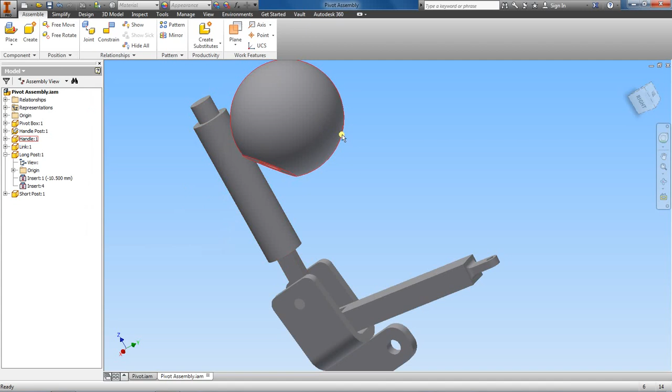Finally, let's go ahead and assemble the handle onto the handle post. As you can see, this is a circular shape here, and it is going into this hole here.

So when I go to constraint, the best assembly option to choose would be insert, and we are going to want... let's see how we want to do this. We will do these oppose. Let's see what this gets us.

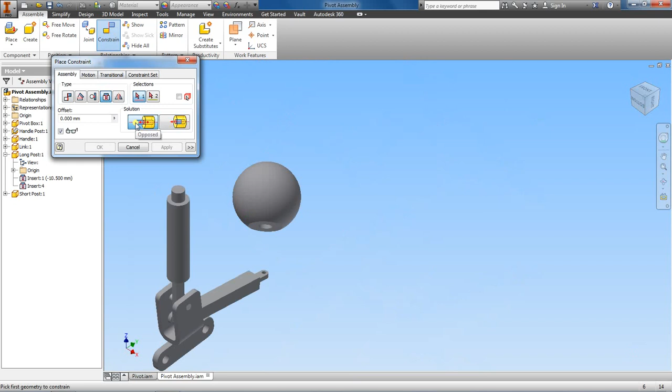Okay, so here I'm choosing the top part of the post, and then here I'm going to choose this outer edge. Let's see, this is what I get.

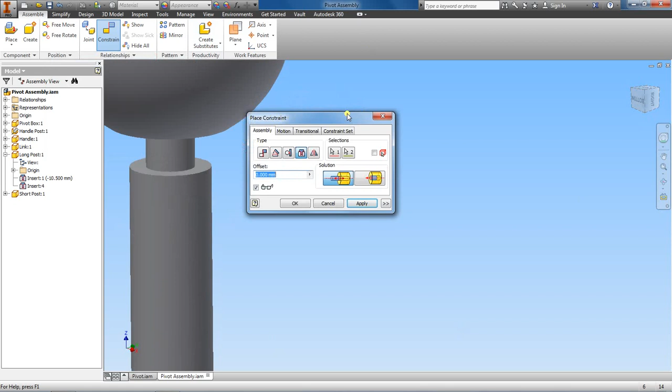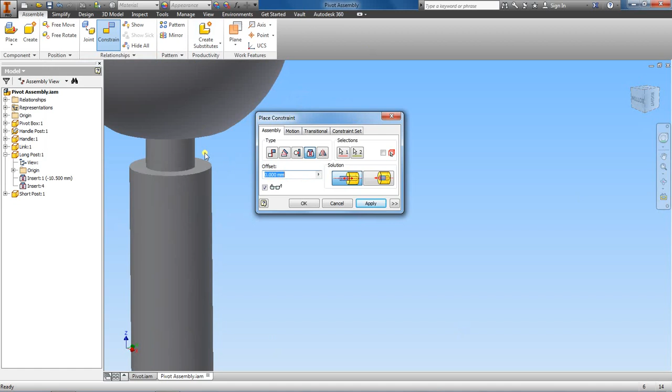Get out of this, and so it's gonna... alright, there. There's other ways you could have achieved the same outcome, but we saw that it was centered, everything was centered, but it was just slightly off, so we used an offset to make sure that this is flush down on our handle post here.

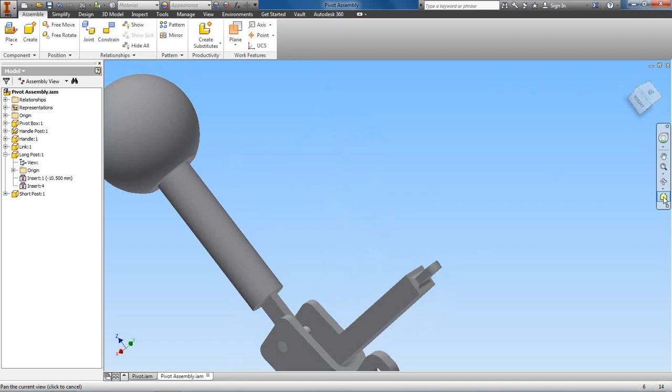So there you have it. And remember, let me move this around. Remember that the handle post is still grounded, but this isn't, so I can move this up and down like this.

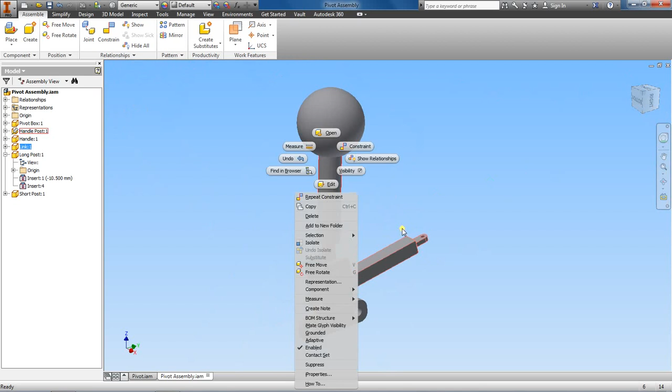One thing we can try also is we'll take this handle post and see if I can take the ground off of this. Let's make this grounded and unground this. So I made the pivot box grounded, and then I made all these other parts so they can move.

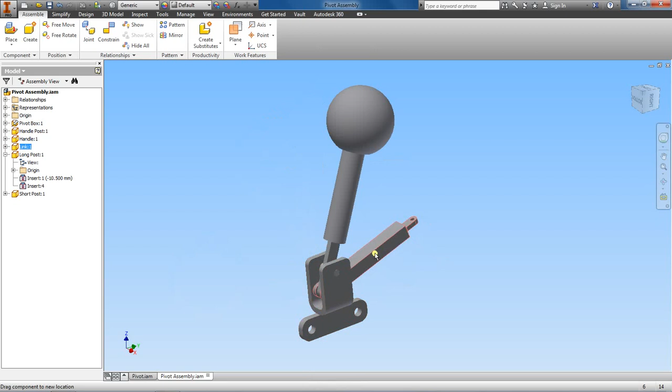But remember, we're constrained at this point here, at this long post. So even if I move this in or out, it's just going to rotate, since it's constrained at that point. If I took the constraint off it, then it would slide all over the place.

There you have it, and you can set this how you want to. But there is our assembly.

Let's go back to our original assembly. All right, here's our pivot assembly. I'll create it. Okay, so next we'll move on to where we create a presentation. We'll start a presentation file where we create an exploded view of this pivot assembly.